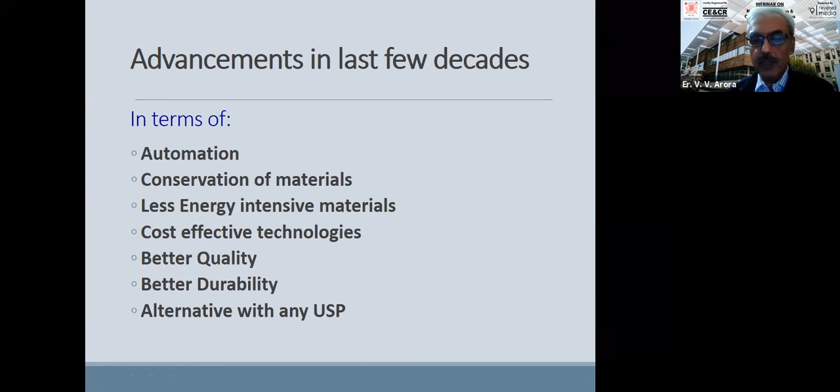The advancements have been in terms of automation, conservation of materials, less energy intensive materials, cost-effective technologies, better quality, better durability, and alternatives with any other USPs. The basic requirement when we do developments in civil engineering is that it should be a sustainable development and a safe development. Our focus has to remain on that, that things are sustainable and safe for the future.

For sustainability, we need emission reduction and conservation of natural resources. So we have to use low energy intensive materials, waste-based materials, lesser materials, and increase durability, because if structures last longer, you are also saving on materials, which is possible through proper design for durability. We call it performance-based design. You can optimize the design according to the performance, so you achieve better durability and better sustainability.

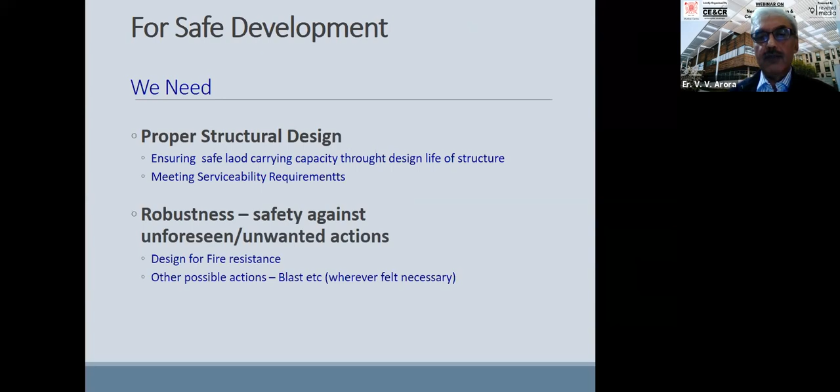For safe development, we need proper structural design, ensuring safe load carrying capacity throughout design service life and meeting serviceability requirements. And robustness, safety against unforeseen, unwanted actions, less fluctuations during the use, design for fire, design for blast, design for impact. Those are the things which are coming up.

Newer practices and materials, if you talk of, then increased use of materials we will see in near future is the supplementary cementitious materials, which are already in use in this decade, fly ash, silica fume, etc. Blended cements, slag cement, and now the tertiary blend cements are coming, composite cement, and LC3 cement, that is limestone calcined clay cement, is also coming now.

High strength concrete was there since long, but there were no specifications in our design. Our IS 456 did not have design parameters for high strength concrete. We could make high strength concrete, but designing structures with high strength concrete was a bit difficult. So that will be becoming possible now. High performance concrete had come in NBC, but it is still to be better defined for a better usage.

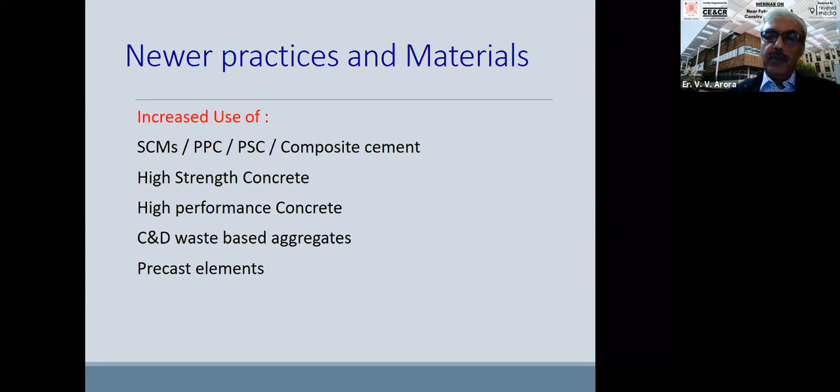C&D waste-based aggregate usage has started, but it has still to go a long way. Precasting is increasing, precast elements, and that is also to go a long way in the near future. Other newer practices which have come now are pervious concrete, geopolymer concrete, controlled low strength material for backfill, etc. Because everywhere soil backfilling doesn't sustain, many times you have problems of settling the backfills because we could not compact it properly. The new thing coming is 3D printing. There also significant developments have taken place.

Newer design practices are the performance-based design, design for durability, design for fire resistance, etc. There's a lot of work on design for durability world over, even in our country also, but less on the design for fire resistance. We will discuss on that.

Then comes the role of standards. You see, we have seen many times technologies available, but they don't get into much use in the absence of specifications and codal support. Recently, a lot of work has been done in this direction. This is necessary for promotion of newer technologies. Some BIS standards have been published, revised recently, and somewhere we are the leaders in the world also. Some standards are under revision and preparation.

These are some of the revised standards, new standards in the last few years. National Building Code came in 2016. There were big revisions in the fire chapters, then the sustainability and high performance concrete chapters had come in that. IRC 44 on concrete mix design has been revised, and pervious concrete has also come in that. Guidelines for use of C&D waste have come up in IRC 2017. So that will also promote usage of C&D waste.

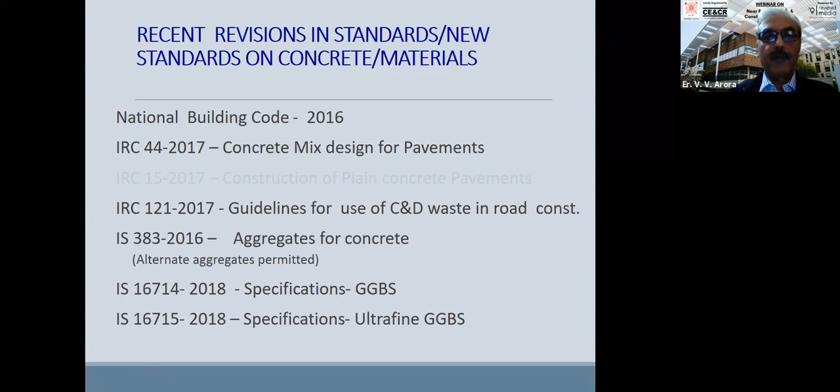Another development is the lightweight sintered fly ash aggregate for structural use. Sintered aggregate, fly ash based aggregates. Now, this has come for structural use. Earlier, the lightweight aggregates were not for structural usage. This document is for structural use of lightweight aggregates. One plant of IMFA has already come up in Odisha. And NTPC is also coming up with their project on sintered fly ash aggregates. So this will also come up because these lightweight structures have got a big role to play in reducing the materials.

Then composite cement, IS 16415. This is a tertiary blend where we use fly ash as well as slag combined, and we reduce the OPC content to a significant value, which reduces the OPC, which is an energy intensive material. But there are certain issues in that we will discuss. IS 10262:2019 on concrete mix design has been revised. Mass concrete has been addressed in that. High strength concrete is addressed in that.

IRC SP 63 revised 2-3 years ago, interlocking block pavements. Now, this I have specifically mentioned because in this code there is an introduction of pervious concrete and CLSM.

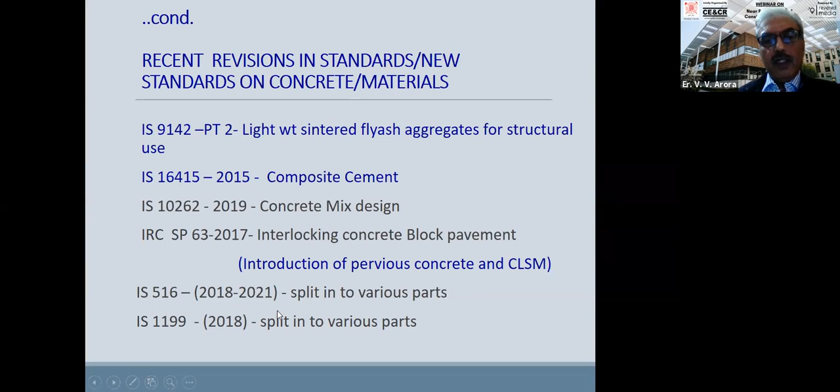IS 516, that is the test methods of concrete. This is a supporting code because without test methods, we cannot do much of the work. We cannot have developments. IS 516 has been split into various parts. This pertains to hardened concrete testing, and IS 1199 pertains to the fresh concrete testing. So this has also been split into various parts. Other numbers which were in for the testing of concrete, they all have been merged with 516 and 1199, and it is in a systematic document.

This is 516. Some parts came in 2018, some came in 2021. And now we have durability testing also covered in this, core testing. Then we have got included guidance on the evaluation of core tests, part 4 of IS 516. And this has been revised. Non-destructive testing has also taken place. UPV, rebound hammer, carbonation depth test has been added now. And determination of drying shrinkage, moisture movement, that has also come in this.

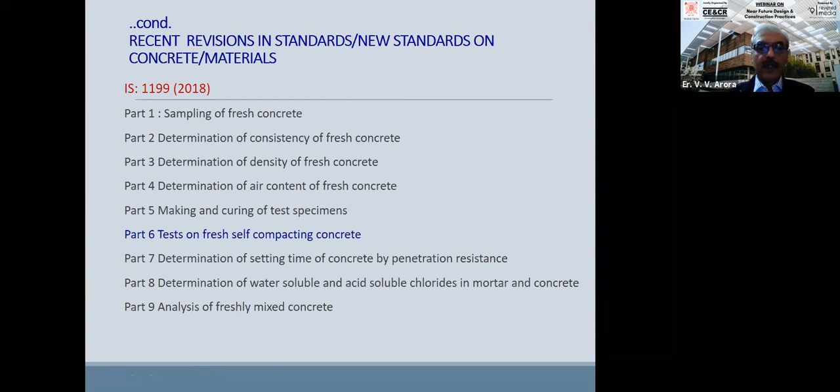And in 1199, one we see is sampling of fresh concrete, determination of consistency. They were already there. But test of fresh self-compacting concrete, that has also come now in 1199, which was staggered here and there earlier. So with these specification improvements, it will promote the developments in the newer fields.

Standards under revision are admixtures for concrete. Suggestions are invited from the industry on this. I had mentioned this earlier in one of the lectures also. More admixtures will be added to 9103, like corrosion inhibiting admixtures, crystalline admixtures, shrinkage compensating admixtures, and things like that.

IS 456, plain and reinforced concrete. This is the major code of civil engineering. This is also under revision. Major revisions will be taking place in this code, where we are talking of performance-based durability design, etc. And roller compacted concrete is available in IRC 68, and this is also under revision. And this will also be improved.

Recently published standard is geopolymer concrete 2021, whose usage has already started to some extent. And more players are coming in this. From abroad also, people are coming with patented mixes from Australia, from Finland, in the geopolymer concrete field. So we may see a good development in this area in the near future. Of course, it depends on the cost economics. If they can make it a little cost effective, you will have more usage. Otherwise also, this being a greener material to some extent, maybe this will also be a better development.

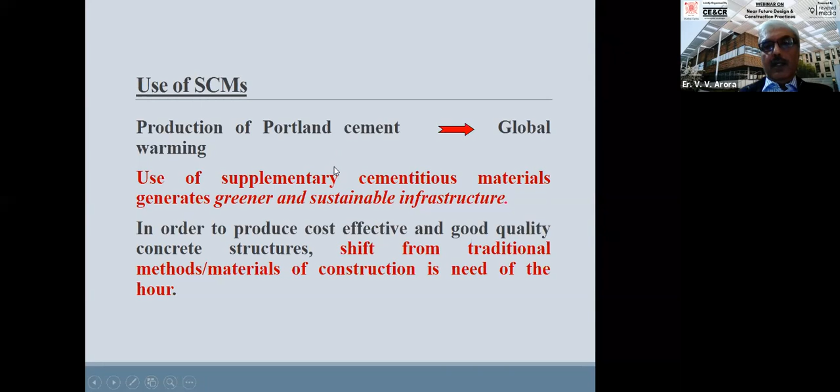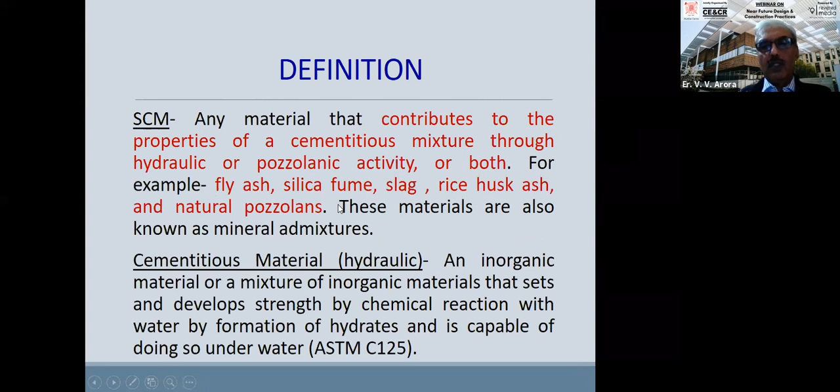Supplementary cementitious materials. This is not a new thing. A lot of work has already been done on this. This is just refreshing on that. It generates greener and sustainable infrastructure. Shift from traditional methods of construction is the need of the hour. Any material that contributes to the properties of cementitious mixtures through hydraulic or pozzolanic activity or both is called a supplementary cementitious material. In short, we call it SCM. So fly ash, silica fume, slag, rice husk ash, natural pozzolans, ultra-fine materials, they all come under this category.

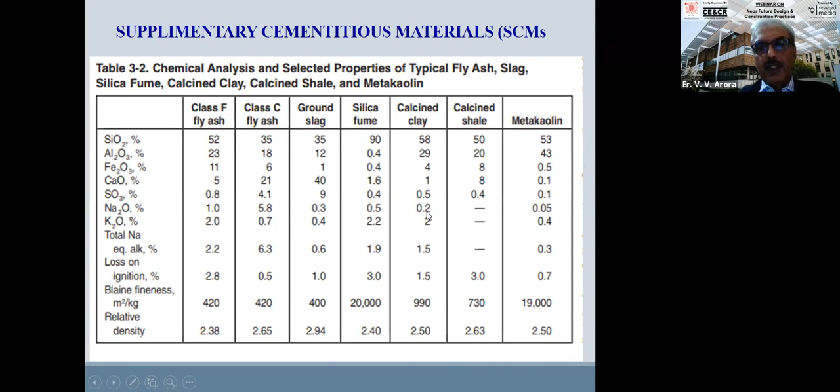Various SCMs are available: fly ash, ground slag, silica fume, calcined clay, calcined shale, metakaolin. Now, fly ash is commonly in use, but other things are still not widely being used. Now, ultra-fine slag has also come in this category. Use of calcined clay will be increasing in making of cements. Metakaolin will be increasing, and ultra-fine slag will be increasing in the near future, because they also have supplementary cementitious properties. For fly ash, we already have a document on this, 3812, and we can generally use it.

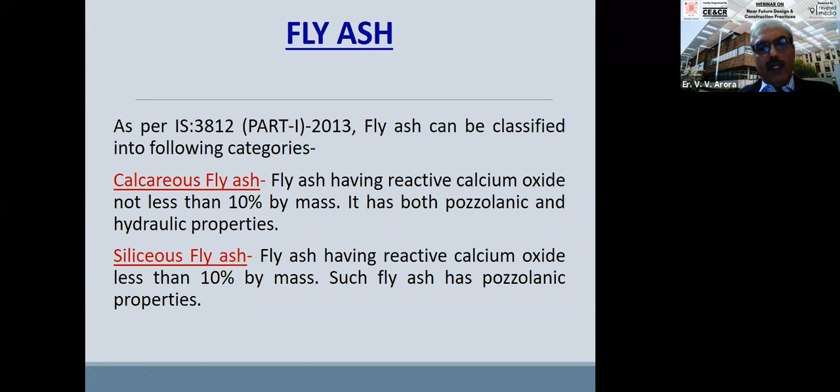We got two types of fly ash, siliceous and calcareous. Our fly ash is mostly siliceous.

The silica fume standard had come earlier, in 2003, long back.

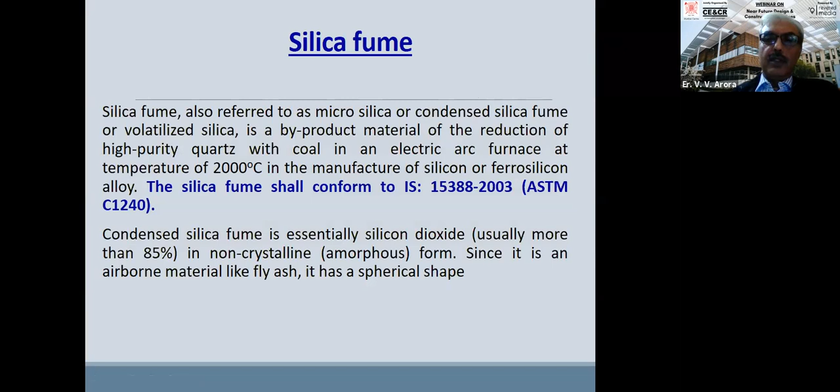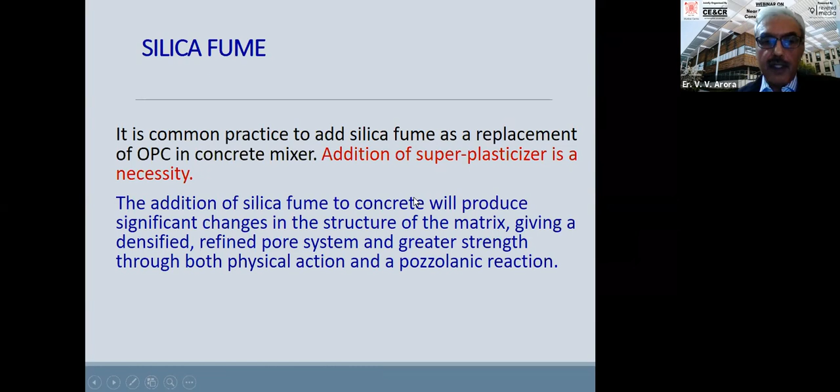Silica fume addition, along with a superplasticizer, is generally a necessity when we use silica fume. The addition of silica fume produces significant changes in the structure of the matrix, giving a densified, refined pore structure and greater strength through both physical action as well as pozzolanic action. Guidance on this is being added in mix design codes, IRC 44 and IS 10262. Generally it is used in the range of 2 to 4%, and 4 to 7% for normal concrete, 8 to 10% for high strength concrete, and for high chemical resistance, 10 to 12% also.

GGBS, ground granulated blast furnace slag, is a cementitious material, and the quantity used in concrete or in cement making is large. Only energy consumption involved is the grinding of the slag.

The document for general use of ground granulated blast furnace slag came in 2018, IS 16714. It is a non-metallic product consisting essentially of glass containing silicates and alumino-silicates of lime and other bases, developed simultaneously with iron in the blast furnace.

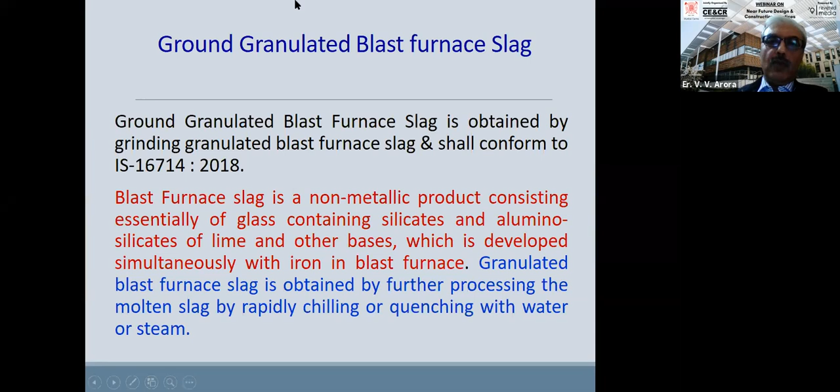This is a very good material for concrete and cement, and it can directly replace cement up to 50%, even up to 70%. Our Portland slag cement has this provision of 50 to 70%. So either people use Portland slag cement, or it can be used in concrete directly, wherever required at site, where proper mixing is possible.

If we are using it now, this is very good for resistance to alkali silica reaction. Wherever the aggregates are prone to alkali silica reaction, GGBS is used, and in that case a minimum of 50% has to be used to be effective against the alkali silica reaction. The requirements are covered in IS 12089.

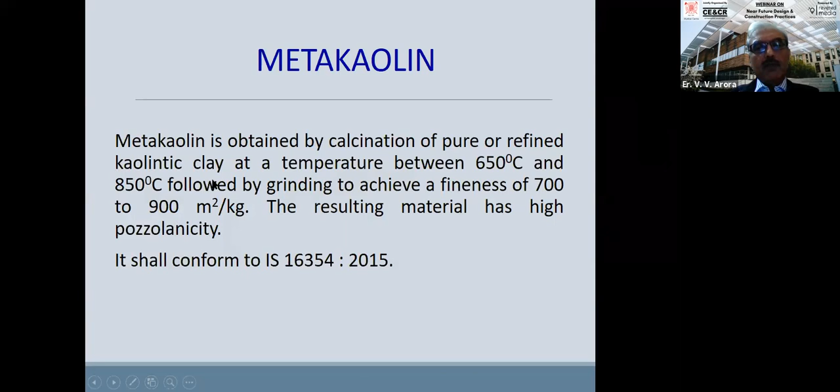The fineness of metakaolin is 700 to 900 meter square per kg. It's a very fine, ultra-fine material with very high pozzolanicity. But because we are not making much metakaolin in India, there is a clay limitation as well -- calcined clay is required for this. However, we do have some calcined clay reserves also, so we will see some usage of this in the near future.

Now this is a newer thing, ultrafine ground granulated slag. One is the granulated slag we just discussed, where we use 50-70%. But the same ground slag is then given ultrafine grinding. This becomes a kind of replacement for silica fume, which gives more pore filling effect as well as pozzolanic effect, with cementitious properties also.

Code provisions for ultrafine granulated blast furnace slag are given in IS 16715, 2018.

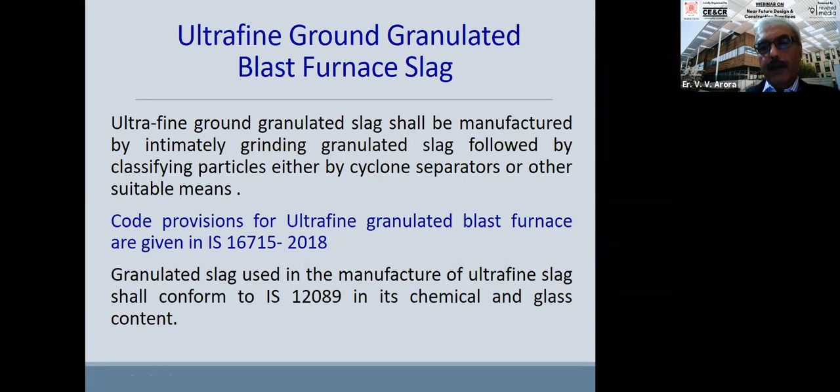Physical requirements for ultrafine slags are: D50, the diameter for 50%, should be less than 5 microns, and 95% of the material should have a diameter less than 15 microns. So this is a very fine material. Slag activity index is also mentioned in this. This material was already being manufactured, but specification was missing -- so now specification is also there.

Usage of this is increasing day by day. People have already started using it, and as high strength concrete design parameters come in IS 456, more high strength concrete will be used. When we use more high strength concrete, more usage of ultrafine slag will be there, and more usage of silica fume will be there.

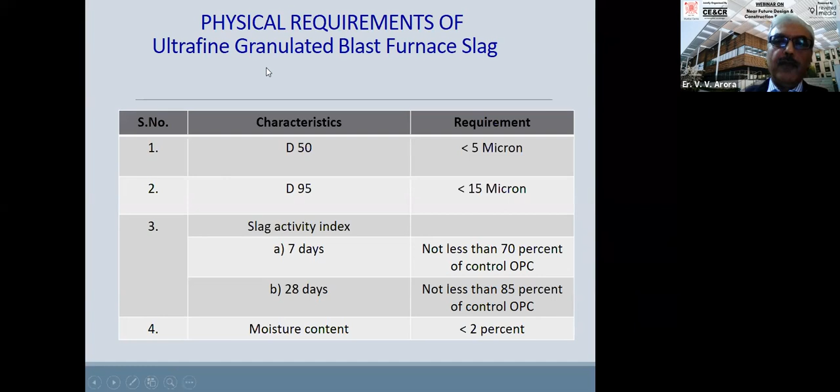Composite cement is a ternary blend cement where we use Portland cement clinker, fly ash, and granulated slag.

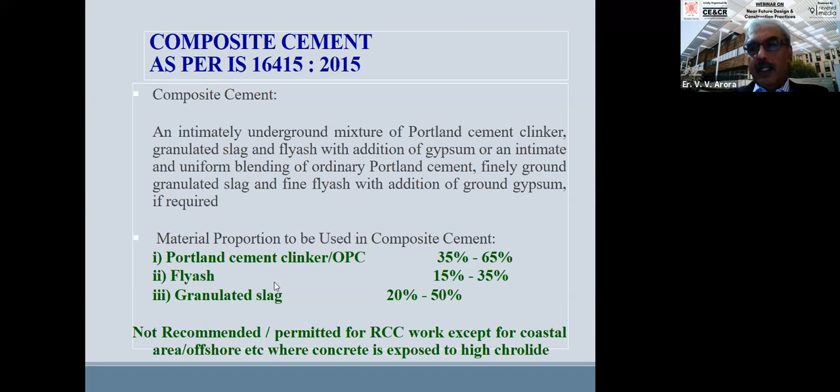In composite cement category, we have another cement, LC3 cement, also called LCC cement - limestone calcined clay cement. That cement has been developed, but the standard is yet to come, so it is not commercially available as of now, though a proposal on standard making is already in process. It is also a composite where we have limestone and calcined clay - calcined clay is like our metakaolin, so it's a similar technology with calcined clay and limestone Portland clinker. That will also come in the near future.

High performance concrete is generally a high strength concrete, but with specific requirements of higher performance for a particular need. This definition was very vague earlier - people had been using high performance concrete since long, but what is it exactly? There was no such document. Now in the last National Building Code, this was defined in a way, and categorization was also done, so slowly the usage of this will increase.

In fact, usage is already there, but the thing is to specifically specify high performance concrete. The performance requirements have to be decided for a particular usage, for which we need more research. As we get more research, we will have a better specification for high performance concrete.

High performance concrete can be for higher workability or constructability requirements, or we can have high performance concrete where we have strength and strength-related properties. If we say we need a high strength concrete, or very high strength concrete, that is also higher performance. We can say we need a very durable concrete - that is also the higher performance we are looking for. But then we have to specify those performances in numbers, so for that we should have certain data.

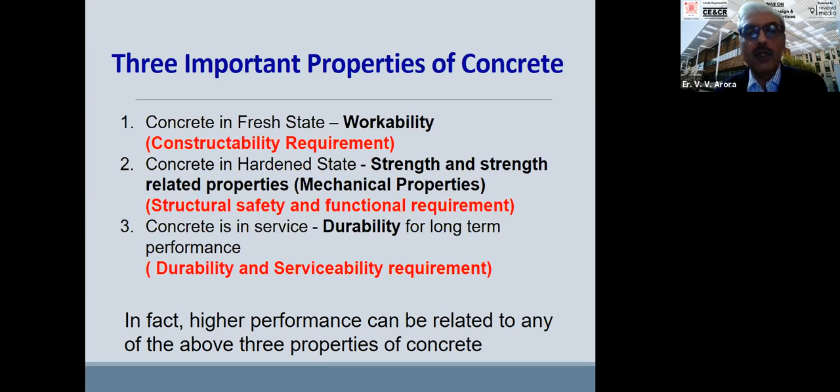Now for durability design, we are creating data for durability design in IS 456. And for other requirements also, for example if we need high resistance to abrasion, we should know for what application and what performance requirement should be there so that people can specify. Researchers are working on those things, and that will also come in the near future.

High performance concrete generally consists of basic admixtures, nothing much special - aggregates, water reducers, plasticizers, mineral admixtures, chemical admixtures, fibers, polymers, corrosion inhibitors. Depending upon the type of improvement in performance required, admixtures are chosen and concrete is made.

Some companies and RMC plants are already offering many kinds of things, but specifiers find it difficult to specify the requirements in terms of testing which can be done. So if I say high impact resistance, I should be able to specify the numbers - what high impact I am looking for, and for my usage, I should know those numbers. More work is needed on that.

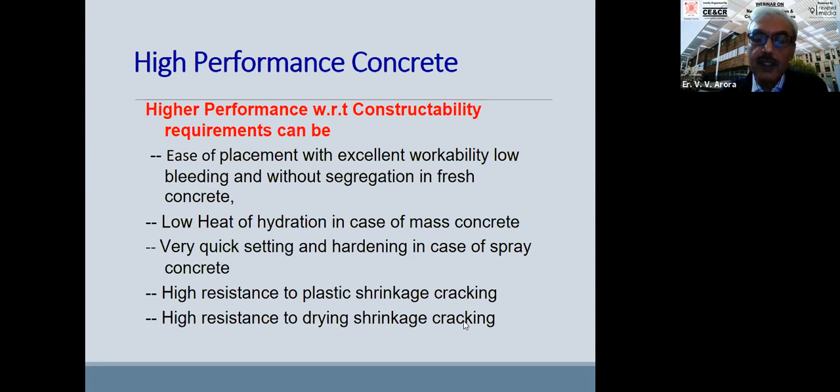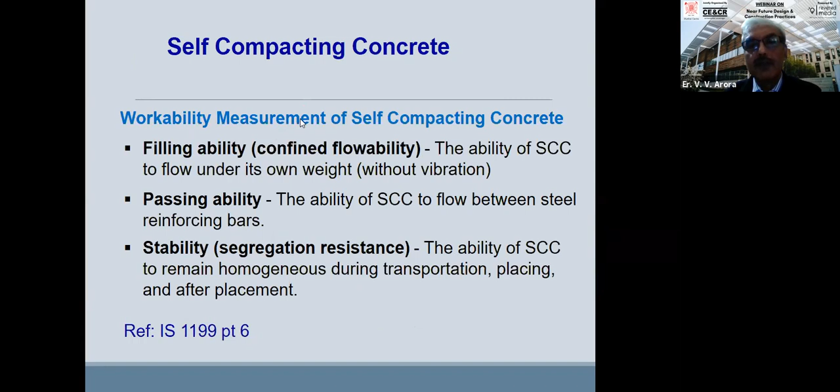High performance with respect to constructability is ease of placement, like we have self-compacting concrete. We can have high resistance to plastic shrinkage cracking, high resistance to drying shrinkage. For self-compacting concrete, we already have IS 1199 part 6, where test methods are given, so this can be specified in those terms.

When we talk of high performance with respect to structural safety and functional requirements, we can have high early strength, or high early flexural strength. We can have higher ductility, high resistance to abrasion as already mentioned, and low shrinkage and creep requirements.

Shrinkage reducing admixtures were being used in many developed countries, but in our country it is still not in use - not commonly available in abundance. Some companies are making shrinkage reducing admixtures now, but they have to get it tested, and some standard has to be there for that. In the next IS 9103 revision, these admixtures will be available with some specification, so that if an admixture conforms to those requirements, we can call them shrinkage reducing admixtures.

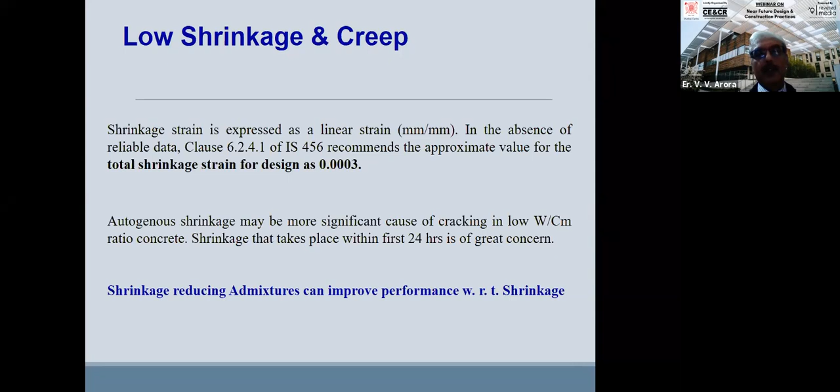So more research is being continued in this direction, but we will definitely see them in the near future.

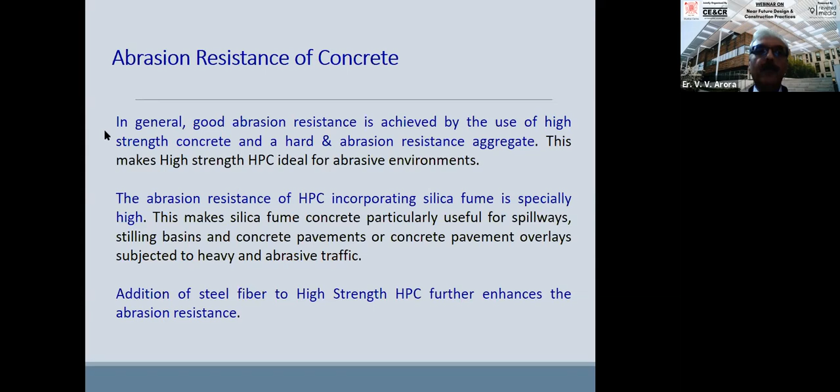Similarly, impact strength and penetration resistance. Incorporation of steel fibers increases the impact strength also, and silica fume also increases these properties. We do have test methods for this. Drop weight impact testing is there. For abrasion also we have got tests. But then we have to decide the specification.

Concrete can be classified into various categories depending on strength. We have low strength concrete, conventionally, not as per IS 456. Categorization: low strength concrete is up to M20. Beyond M20, 25 to 50 is moderate strength. High strength 55 to 120, we now call it 65 to 120. And beyond 120 comes ultra high strength concrete, which has already come.

The researchers are working on that. Some companies are also working on that, which can be macro defect free concrete, densified small particle concrete. Reactive powder concrete is a common name for this also, and aggregates are missing. That is why we call it reactive powder, because we don't use aggregates when we go beyond a certain value. Aggregate-concrete-mortar interface becomes a weaker zone, so aggregates are avoided.

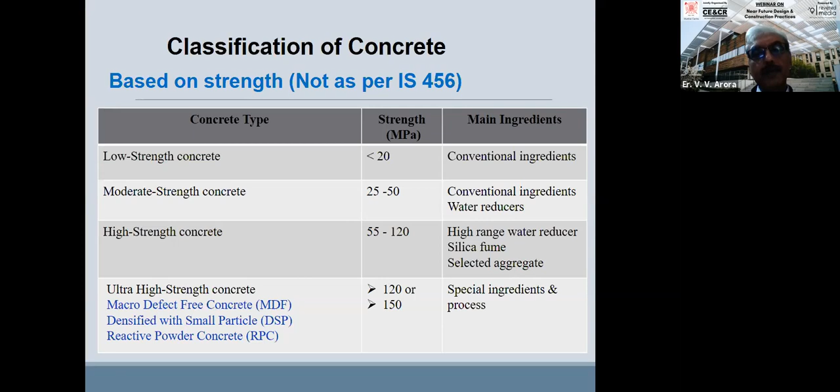As per IS 456, categorization is ordinary concrete, standard concrete, and high strength concrete. Ultra high strength concrete is not yet put in IS 456. It will take its own time once the technology is developed fully, properties are well known, and Indian material is tested for properties. Then it will be included in the codes.

Now in the coming code, IS 456, design parameters for concrete up to M100 are being added. Earlier we did not have design parameters for high strength concrete. We had this high strength concrete in our current IS 456, but then the note is given that for design parameters, refer to expert literature, specialized literature. The new code will have detailed provisions for high strength concrete design.

So a structural designer would find it very convenient to use and specify high strength concrete, and those approving the designs will also have some specification in hand to approve those structures. So then the usage will come up, but ultra high strength concrete is still at a primitive stage. It will take some more time.

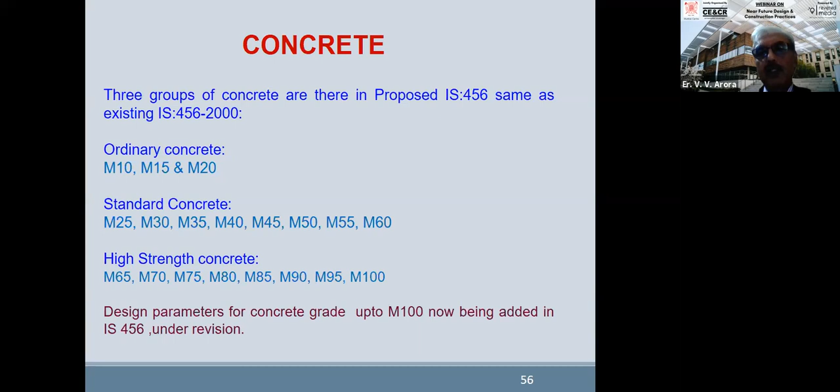Same thing, it is there. Some findings summing up on these specific materials on high performance is addition of silica fumes. This is a summary of what I have said earlier. It improves flexural strength, split tensile strength, abrasion resistance, and impact resistance. And inclusion of steel fibers enhances toughness, moment capacity, tensile strength, ductility, impact resistance, and abrasion resistance of concrete.

Concrete with abrasion resistance property can be designed using silica fume, high-range water reducers, where aggregates are mechanically strong, addition of fly ash, and a higher grade of concrete. When used in combination with these materials, that really produces a high-performance concrete. Because if our grade is low, then even if you add these materials, you will not be able to achieve a high-performance concrete. That also has to be kept in mind.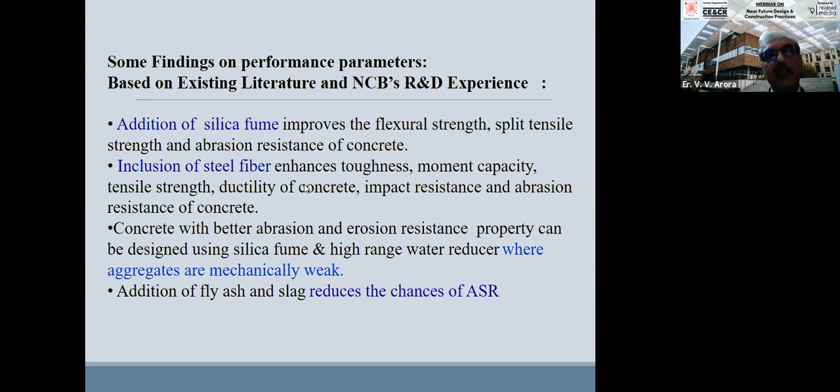Coming to high performance with respect to durability requirements, I will discuss this a bit later in this lecture, under performance-based durability design.

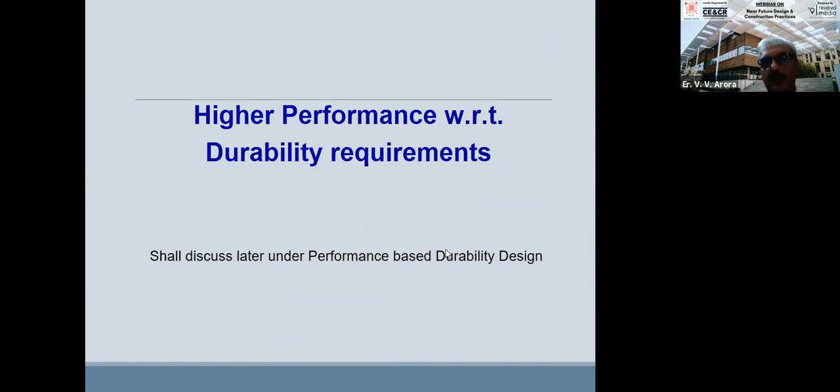Before that, let us come to recycled aggregates. Recycled aggregates are construction and demolition aggregates which are produced from construction and demolition waste. That is, we are recycling the old concrete.

In the forthcoming decade, the availability of naturally occurring construction materials is going to be exhausted. So the need of the present system is alternative construction materials like recycled aggregates, either coarse or fine aggregates; both can be generated from old concrete. If the old concrete is good quality, high strength concrete, you will get good quality recycled aggregates. If you are crushing a very poor quality concrete, you will find poor quality recycled aggregates.

Those variations are a big hurdle in the usage of C&D waste. If somewhere the structure is being rebuilt, if you are breaking a bridge and making a new bridge, or a multi-story is being demolished and a new structure has to come up, there it becomes easier because the grade of the earlier concrete is good and known also. Then in-house crushing will be better instead of sending the scrap to the C&D plants, because there it gets mixed up.

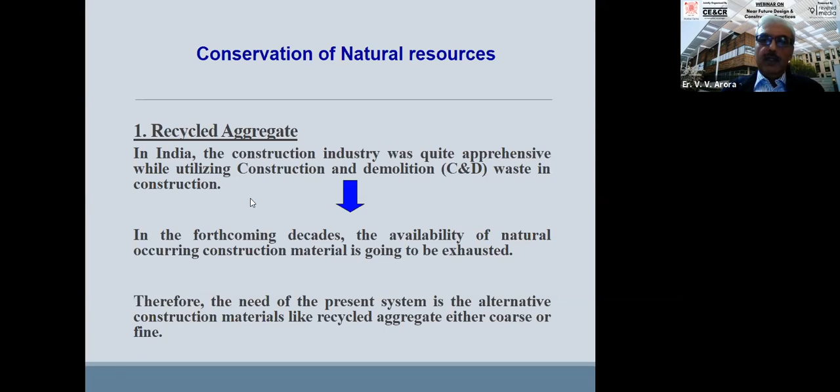I see alternatives to natural aggregates. C&D waste-based aggregates, we are now mentioning in 383. Then we have other alternate aggregates: slag-based aggregates, copper slag, air-cooled blast furnace slag, steel slag. Steel slag is to be avoided in RCC because it contains free lime. Now people are putting up weathering plants to remove the free lime, but caution has to be taken with this steel slag. But air-cooled blast furnace slag and copper slag are very good materials. These two materials can be used.

C&D waste, we are coming up with specifications, so this will be used. Fly ash sintered aggregates, I already discussed. A new standard has come, 914 in 2020, very recently, and IMFA is already making those aggregates in Odisha. NTPC is coming up with a new plant. So all these alternatives to natural aggregates will be available in the near future. Steel slag weathered aggregates will be there, but I will recommend them for usage in non-structural things only, not in buildings, because if weathering is not proper, we may have some risk.

C&D waste, if you see, this we discussed already. The C&D waste comes in two categories. One is recycled concrete aggregate, and there is recycled aggregate. The first is a better quality aggregate, when we demolish waste concrete. The other is when we demolish a building and concrete, masonry and other things get mixed up. This can be used for some non-structural purposes. For structural purposes, we have to use RCA.

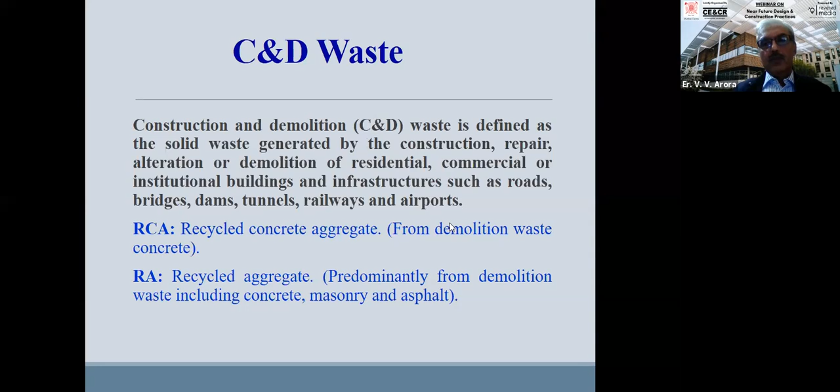The only thing is, government has to come up with a collection of waste. In all countries, a lot of waste is being generated, and collection systems are still not very good in place. Everywhere we have to create dumps in different areas where people can throw C&D waste. Now people pick up the waste and put it in any vacant space they find, and sometimes on the roadside also, which is a bad scenario. Once that scenario is improved, usage will also improve, because as far as crushing is concerned, there's no issue. Many plants will come up. Once waste is available, many people will crush and sell it.

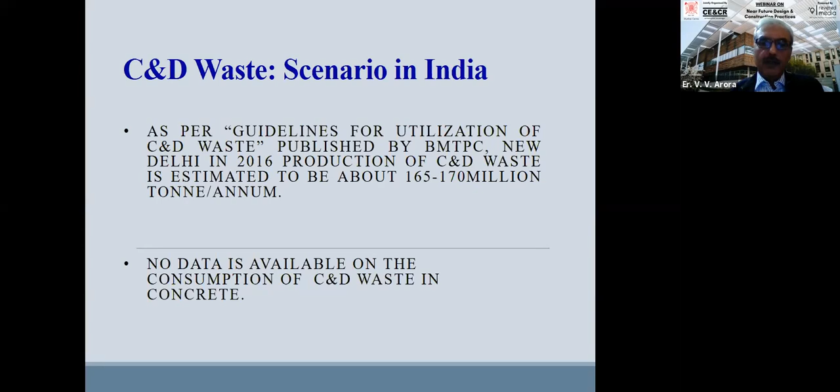This is the scenario world over of C&D waste. Australia says they have got 57% usage, and Belgium also. But in many countries, even though percentage usage is shown high, their structural usage is less. More of the usage is in plain concrete, and RCC usage even in other countries is a challenge, because generating that kind of confidence is bigger. In Japan, even though they say 80%, they have very good aggregates and their old concrete is good quality. But still, people have hesitation in using it in RCC, and the usage is mainly non-structural, with some structural usage in lower grades.

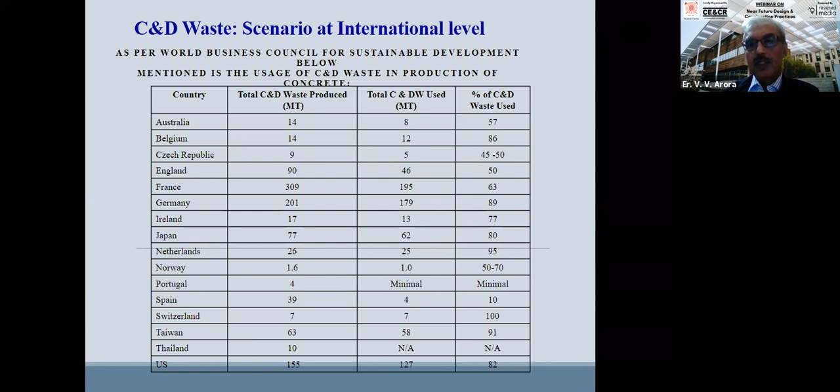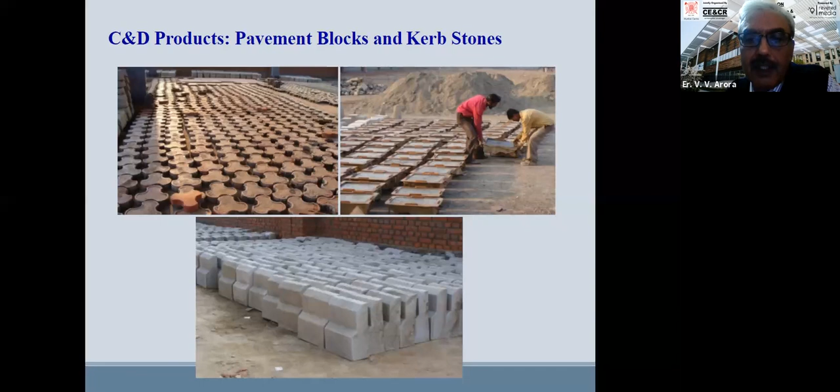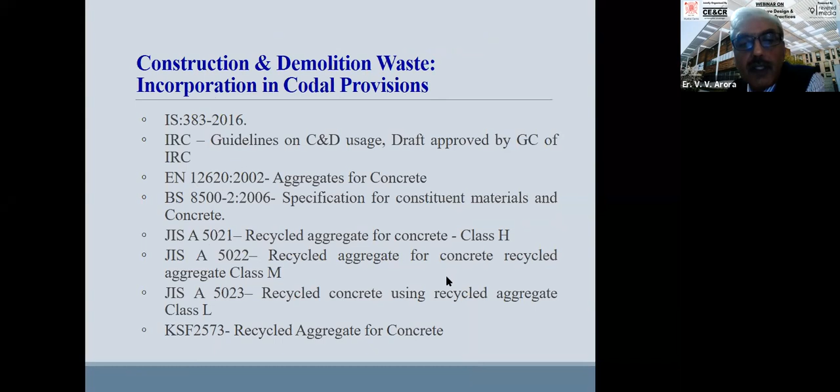If you have got class 1 aggregates, you should be able to use them in the main structural buildings. That work is still to be done, and as that is done, we will see more usage of C&D based aggregates. Current specification, we have 383, IRC has put up a guideline. EN code is there, BS code is there, JIS code is there. In the Japanese code, we have got a classification of different types of recycled aggregates. The Korean code has also got a recycled aggregate specification.

In 383, in 2016, alternate aggregates were permitted. Iron slag, steel slag, copper slag, and bottom ash were permitted. Similarly, the C&D waste also. In 383 2016, recycled aggregates are permitted up to 25% for plain concrete, and for RCC up to M25, 20%.

And for PCC, 25%. In IRC 15 2017, 30% has now been permitted in the DLC layer only, but in the upper layer, the pavement quality concrete, it is not yet permitted because the abrasion issue is there. But if we use a two-lift construction, that document is coming, there we will be able to use the C&D waste aggregates in the lower part of the PQC.

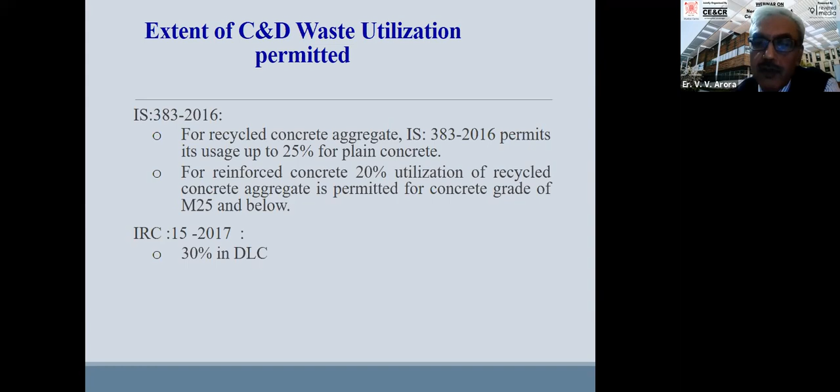Coming to the conservation of water, we have got pervious concrete. Pervious concrete is not very common in our country because there is an issue. This can be used in pavements where the water simply flows down, or it can be used under the roads as a drainage layer, because all roads have got drainage layers where the water percolates to the ground or to the nearby drains. We can have a percolation layer that can be connected to a nearby drain and water can be allowed to flow. This is a concrete in which the water flows freely.

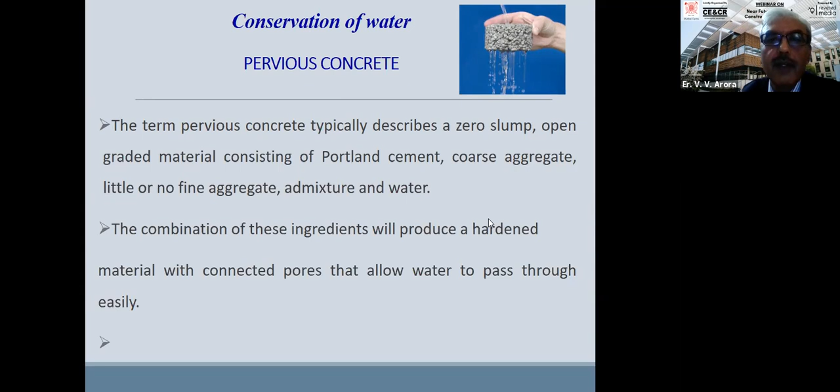The void content ranges from 15 to 35% and strength is 5 to 25 MPa. ACI has got a good specification on pervious concrete, and ISO is making a specification on pervious concrete. A test method on pervious concrete has also already been made by ISO. The drainage rate is generally in the range of 0.135 to 1.22 centimeters per second. Higher the fine content, lesser will be the void content and lesser will be the permeability.

And they are prone to choking by water containing solid particles. That research is also needed, how to unclog it and where it can be used, where it cannot be used. Currently, IRC has permitted usage under the pavements so that it can act as a drainage layer. This is a very good material for that.

Geopolymer concrete. This is a new and very promising material. This is a concrete where we don't have cement. No cement concrete, many people call it. It only consists of fly ash, GGBS, and strong alkalis, and they react at the site in the mixer to form a concrete directly. A new standard has been published in this during last month. Oh, sorry, not last month. This is an old slide, maybe from a few months ago.

Now this standard is one of its kind in our country only. Other countries do not have this kind of standard available. People have some specifications, but ours is quite a wide-ranging specification. We are enabling a code kind of guideline for mix design.

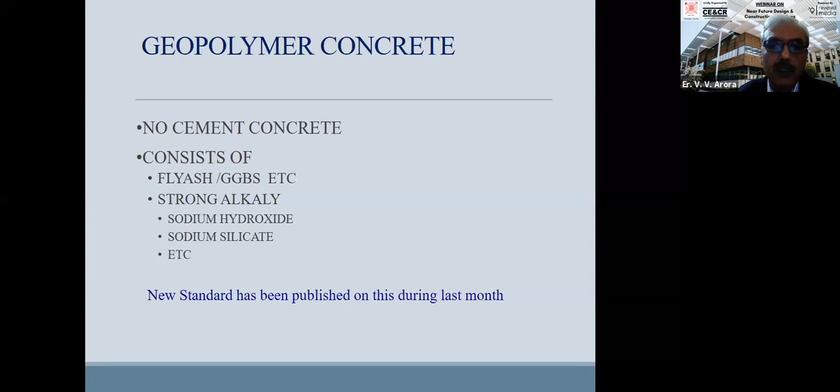This is geopolymer concrete paver blocks. This we had made in our laboratory at NCB when I was in NCB. This is a photograph of a pavement we made there as a test stretch, and this has performed well. These are M35 grade blocks we had created. There were minor issues because of the equipment, but once we use better equipment, those issues will not be there. And this is a very good material.

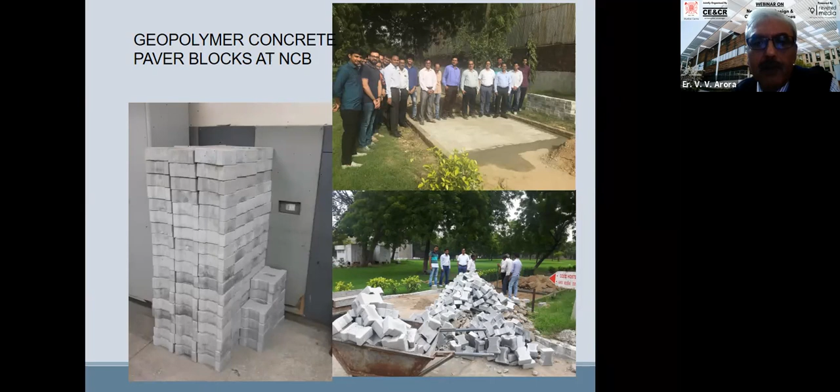This is a greener material, and there is absolutely no issue in using it in non-structural components like paver blocks, kerb stones, and things like that. In buildings, in Australia and elsewhere, people are using it in RCC construction. But here we are still not allowing it, so that people can develop the competence. Let the players be there to do this, and then those things can be done.

This is the document: alkali activated concrete for precast products guidelines. The grades shall be limited up to M40. Applications can be paver blocks, kerb stones, blocks, etc.

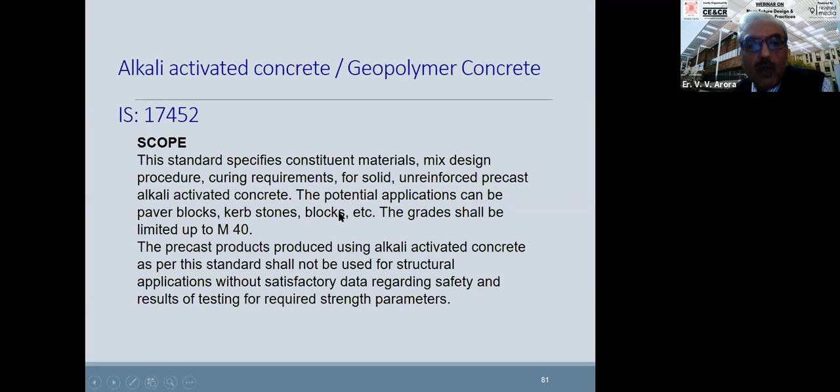Alkali activated materials have been defined in this. What alkali activated materials can be used, and what is the definition? Everything is there. The binding materials that are permitted are pulverized fuel ash conforming to IS 3812, GGBS conforming to IS 16714, metakaolin. All this we discussed previously. Calcined clay also, silica fume. All these are the binding materials which can be used. It is mentioned in this document.

So different institutions, different people are using different technologies, different combinations. So we have permitted all kinds of things. You do some performance testing. It is also a kind of performance-oriented code where you can use any of these materials, and then you can create a concrete. If it meets the specification, you can use it. So initially it is not for RCC.

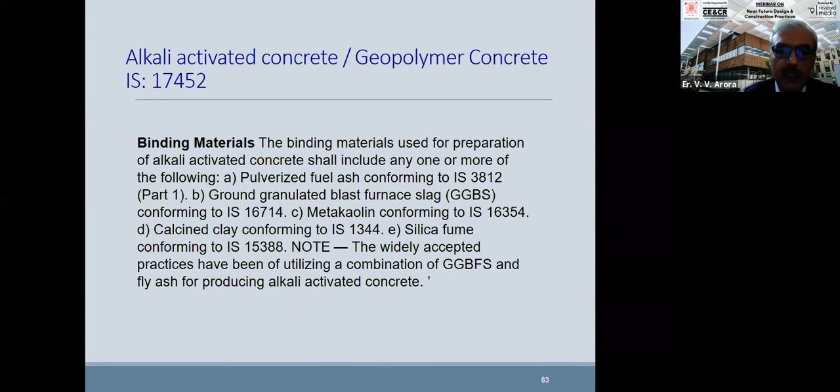Alkali activators are generally sodium hydroxide, potassium hydroxide, sodium silicate, potassium silicate, sodium carbonate, potassium carbonate. Most commonly used activators are sodium hydroxide, sodium silicate, combination of sodium silicate and sodium hydroxide, combination of potassium silicate and potassium hydroxide. But others have also been permitted. So those who have done their work on that and want to use that, they can do it.

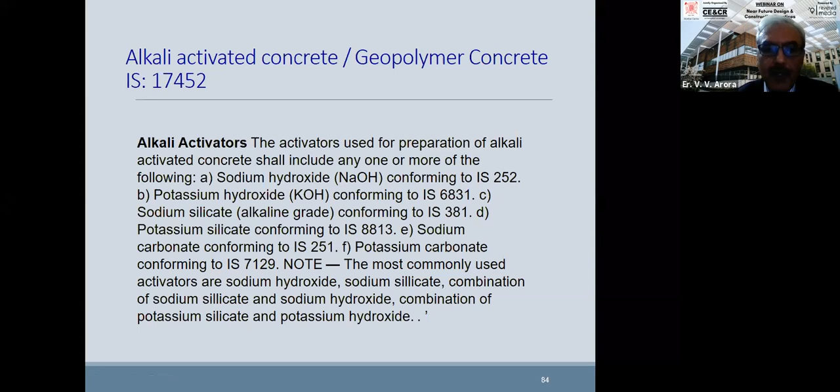But what we are lacking in our country is research on admixtures where we can improve the workability. Issues are there, quick setting issues are there when we do normal temperature curing. If you do high temperature curing, then the use becomes restricted to precast components. So this is possible at normal temperature also, about 25 degrees, 30 degrees and above. And you can use high temperature also. So different combinations are possible. People are using different technology.

And this document gives a good guideline on creating mixes also. Guidelines for mix design are also available in this. Guidelines for production have been added. And safety precautions have also been indicated. These are quite risky to use, so those precautions have also been put in this document. It's a good document. One should go through this.

Now, what we are still lacking is, we have made a document on the production of alkali activated concrete, but we have not permitted its use anywhere. Neither IS 456 permits, nor any precast paver block code, nor the wall block code 2185 permits it so far. So we are working on issuing amendments to those codes, 2185 and the paver block and kerb stone codes, so that this can be used there. Those amendments will come in the next few months maybe.

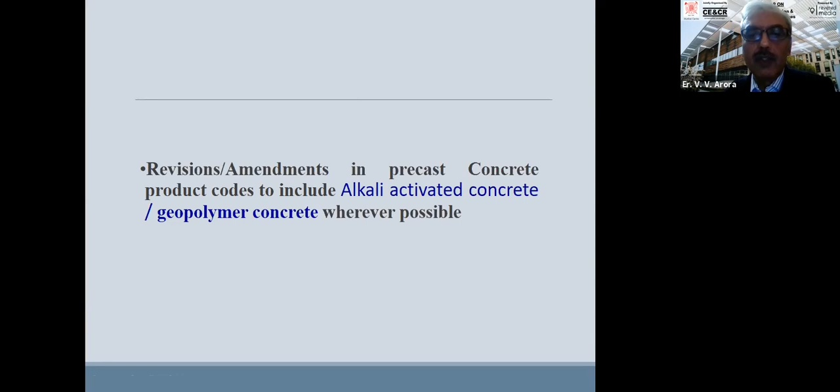Once that comes, you will be able to produce the blocks conforming to IS standards using geopolymer concrete. This will be a good thing, and there is a good future. Many companies are coming from abroad also, and Indian companies are also working on this. Mr. Sunny Surelekar, his company is also working on geopolymer, I think. He will throw more light on this when he speaks after me.

Then newer technology is the, how much time do I have? Still half an hour or so I have. Okay.

Then we have this 3D printing technology. It's a very exciting technology. It saves a lot on labor. Though we don't have much problem of labor, mechanization, as we have seen, improves the quality also, and many times it improves the speed also. It is not only labor saving, because labor will be used elsewhere in making this equipment and other things, and so much infrastructure will be created.

This is three-dimensional printing, it's fast work, and for many things it will be a very good alternative. 3D printed concrete means 3D printers come in when you make an AutoCAD drawing. The current AutoCAD has a provision for creating STL drawings. If you make a 3D model in AutoCAD 2019 and above, I think, you can save your 3D models in STL format, and those STL files can directly be used by the 3D printer to create that structure. Only thing is you have to mention the scale and all that. Those are the print commands.

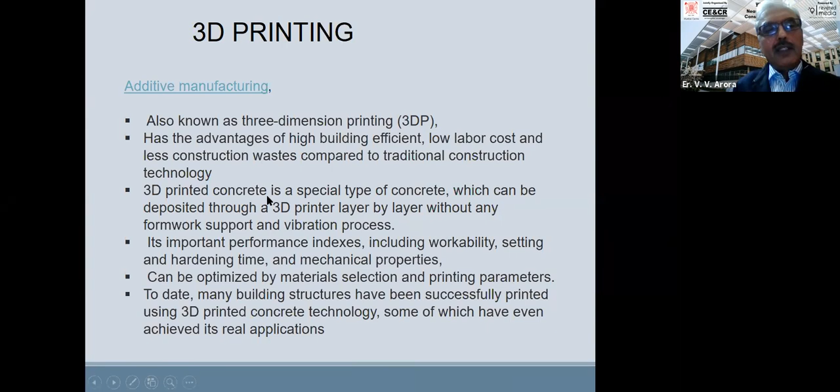Like when we print an AutoCAD drawing, we mention the size of the drawing sheet: this is to be printed on A1, this is to be printed on an A2 sheet. Similarly, when we do 3D printing, we create a 3D AutoCAD drawing, a solid model. That solid model is converted to STL format. For that STL file we give a print command with the scale. Whatever scale the house is to be constructed at, you just give that scale, and the construction will come to that scale.

You can just change the scale and create a small model of the house also. I mean, this is something where you create separate models. Now you can create actual models also for the scale.

See, this is how the layer by layer construction is done. We can have various kinds of structures, whatever we want. We can have multi-layer, anything. We can have intermediate mesh kind of structures. And architecturally we will have no boundaries when we do 3D printing.

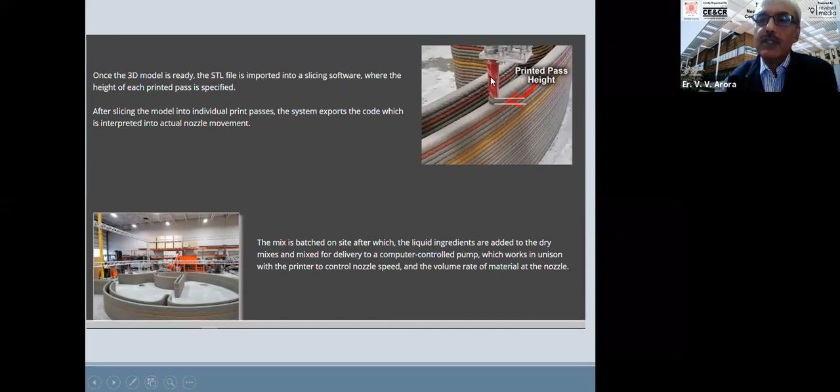Because this kind of construction done manually becomes very difficult. You have to make the formwork accordingly. That formwork expense is saved here. So there is no formwork involved in this. The only thing is you need a good printer. And then what you need is a concrete which starts setting fast. Fast setting concrete has to be there, which fulfills the requirement of 3D printing, which generally is created using admixtures of accelerators, viscosity modifiers, and things like that.

And for many small things nowadays, you can even create a drawing and send it to some suppliers. They send you models. But for actual construction, you need this kind of printer at site. These are a few other sketches of the 3D printing taking place. This is a constructed house.

Now, coming to the Indian scenario. Those previous pictures I've shown you were pictures from other countries. Now, this is an Indian picture where this sample is created by a startup of IIT alumni. IIT pass outs had done some work in IIT, and now they have started a startup. So they have made this house, and they have started commercial production in India. So this is a very exciting and encouraging thing in these technologies. We are coming far.

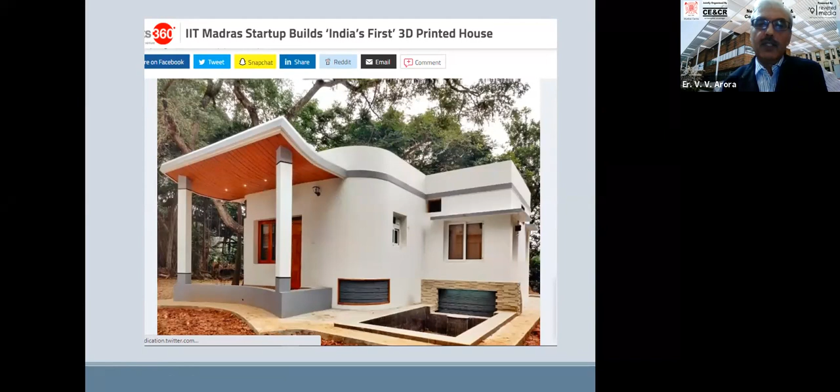And this is done by L&T. L&T is also coming to this. They have constructed a 2-story house using 3D printing. This is also a 3D printed house. So as this thing comes up, more guidelines and specifications on this will also come slowly. If it becomes popular, then the experience is there, competence is developed. Once the competence to construct develops, then competence to make specifications also comes from there on. Because for making specifications also, you have to have competence.

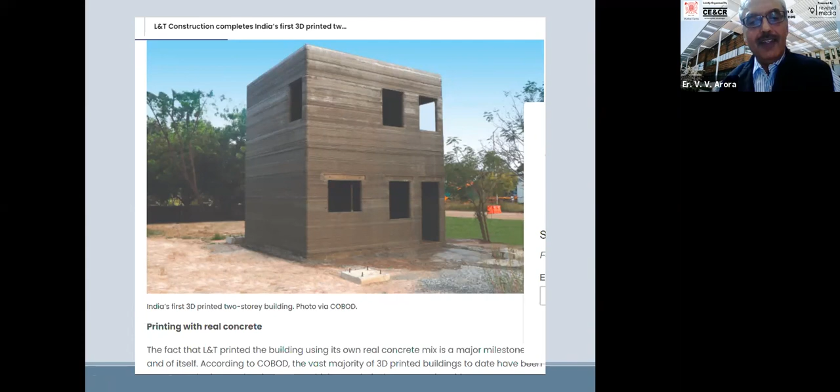Another is controlled low strength material. This is for backfilling, where we can dig and fill it. We don't have to compact it, as it is self-compacting, self-compactable, flowable, low strength cementitious material. In cement and concrete terminology, ACI has got not a specification, but a complete report on that. As per specification, the strength is around 8.3 MPa or lesser. It's a low strength material.

So it's got a wide range of applications like filling voids under existing pavements, buildings or other structures. Particularly when you dig a road for laying pipelines and you do the refilling, those fillings are never compacted. There you can use CLSM. And if you have to dig it later on, then you put the CLSM beforehand so that you can dig it later on and refill it.

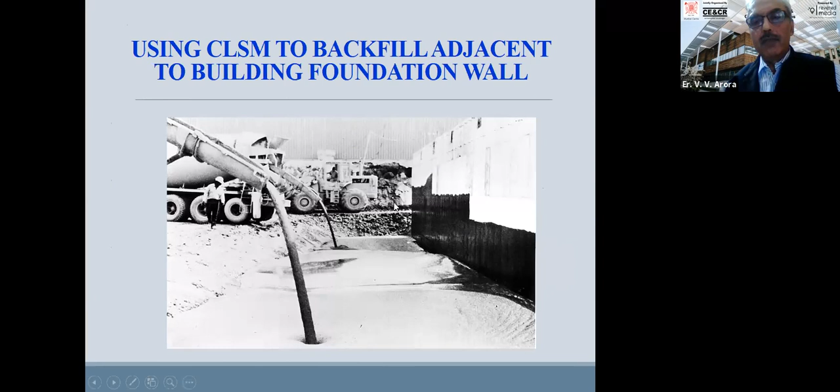This is a flowable concrete kind of thing, and this is being used in the backfilling of trenches adjacent to building foundations. So this is a building foundation wall. You cannot put a roller here and start compacting; it becomes a difficult scenario, because that will have a lot of horizontal impact. So these things are useful. This is also coming up.

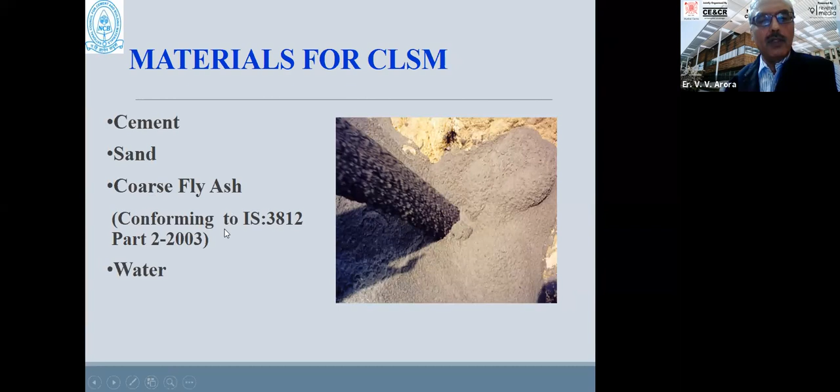We have got a specification. Now IRC has also given a small specification on this, as I mentioned earlier. It contains cement, sand, coarse fly ash. Coarse fly ash is good for this. 3812 Part 2 is good. Mix proportioning guidelines are available. Cement content varies from 30 to 70 kg, and fly ash content varies from 460 to 1200 kg.

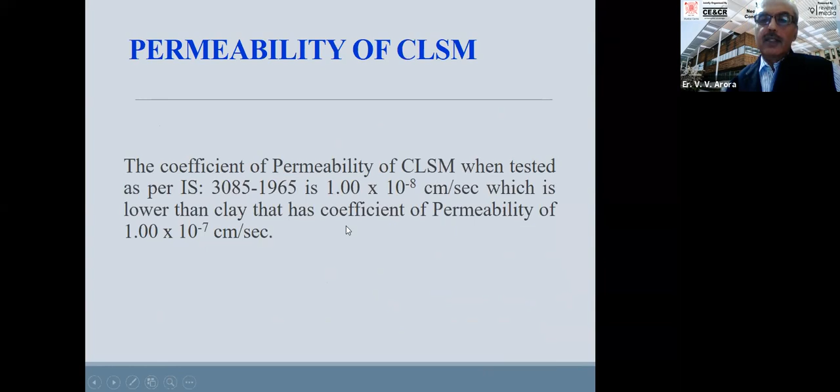Permeability of CLSM can be tested as per IS 3085, and this is 1 into 10 power minus 8, which is lower than clay. That is the coefficient of permeability of this. So it's a bit lower permeability than clay, but it is stronger.

Future aspects of this are that it will be very difficult to find soil for backfilling. That is one thing. But second, what I feel is even if you have soil, there are many places where you have compaction difficulties. So they're also very useful. IRC SP63, interlocking concrete block pavement, mentions some specification about this. This can be used under that.

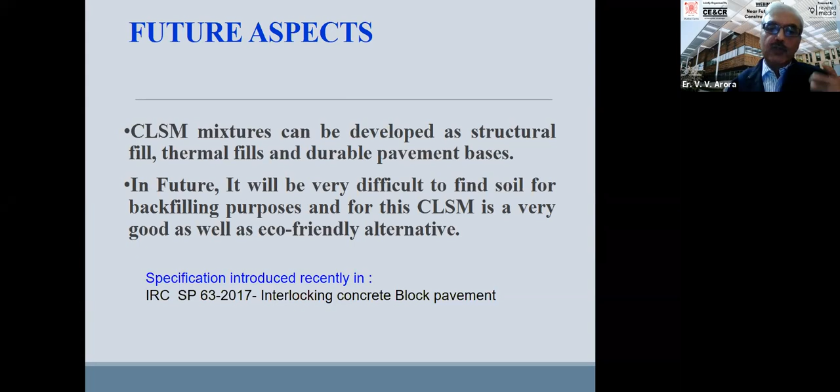This is mentioned in that because on the roadside we are putting the interlocking pavement where our future services go. So that part is left as the block pavement. So once we remove that, then you should have a CLSM filling there. That is why it has been specified there. Coming to the durability, which we were discussing earlier.

Now we had been discussing the developments in material technology and concrete technology. Now these are the developments in design technologies, how we design our structures. When we design our structure, we design for a certain strength and we have to design for a certain life. But today our codes are silent; if you made a structure as per IS 456, you cannot guarantee how much life it will have. People generally say 50 years, but the code doesn't say 50 years.

So if you have to design a structure for 75 years, you don't know what specification you have to improve upon. The CPWD maintenance manual says our structures should generally be for 75 years. But how to make it 75 years, nobody knows. So service life design is a performance-based design where we decide the performance. Performance is that we want this structure to survive for 75 years, or 50 years, 100 years. So that is a performance requirement. That means the structure should be able to perform till that age.

Now, how do we do that? Our potential deterioration mechanisms causing durability problems are the permeation of carbon dioxide into the concrete and the permeation of chlorides into the concrete. This is called carbonation-induced corrosion. This is called chloride-induced corrosion. There are other issues also, but this is the predominant issue I'm discussing. And out of these two, our predominant issue is the first, carbon dioxide, because chlorides are not present all over the country.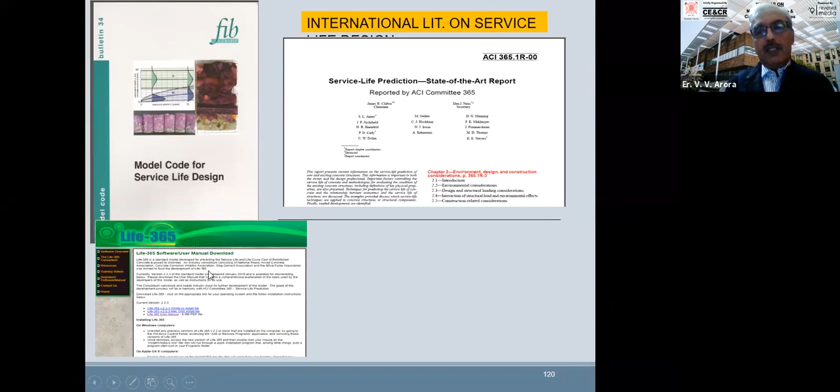ACI Life-365 has become famous because it is software. But this software, we have seen, doesn't give very good results, and it is not of much use to me. Then we have an ISO document, ISO 16204, which was revised in 2012. This is a good document, but it also speaks of the basic concept of service life design. It gives models for assessment of the service life.

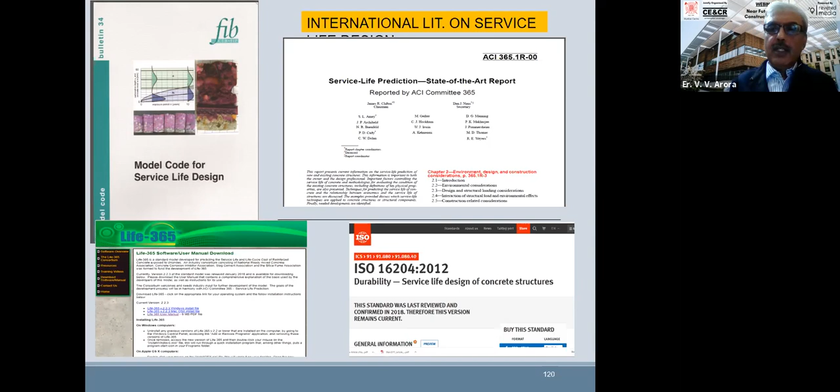But many coefficients required are missing in it, and they say they should be established at the national level. We have done a lot of research in this area, and other institutes, IITs also, are working on this, and we are able to work out those coefficients and the procedure for design for carbonation. Current developments, as I've said: the fib model code is there, similar to 16204. Japanese guidelines are available, ISO is there.

Now, this is the common model which is used. Why we have to use this model is how we assess the service life. How do we determine service life? We assess the service life because we say carbon dioxide ingress deteriorates the structure. How does it deteriorate? When the carbon dioxide enters the concrete and reaches the cover depth; C here is called the carbonation depth, cover concrete.

And when it reaches the cover concrete, it depassivates the concrete. When the carbon dioxide enters, it consumes the calcium hydroxide available, and the pH value of the concrete comes down. A lower pH then breaks the passive layer around the reinforcement, and reinforcement starts corroding from that time onwards. And once the corrosion comes, the cracking and spalling occurs.

So if the carbonation depth is less than the cover depth, the structure is safe. When the carbonation depth reaches the cover depth, then your service life is near completion. The corrosion will start occurring over there. You will have some few more years after that, but then it starts in a fast manner.

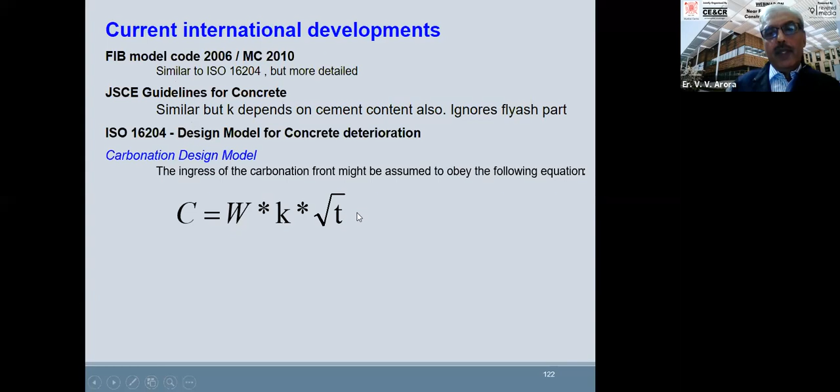We have done a lot of work on this model, but what we have seen, and some other researchers have also pointed out, is that it may not always be root T. The power can be little different. When we use different kinds of cements, OPC, PPC, this may not be root T power 0.5, which is the square root. We have to use a different power, 0.4 to 0.6. So it can vary from 0.4 to 0.6, but the basic model is similar.

So considering this model, this is being considered for the performance durability design for carbonation. And the details of these are being worked out. Weather coefficient is also being worked out based on the lot many investigations conducted in the country on deteriorated buildings. From there the weather coefficient is being worked out, and that will come in our new IS 456 standards. We will be giving methodology to work out this, and simplified tables also.

Last lecture, Mr. Oja had given detail on this, and there was some criticism that this is very complex, but it will not be complex because simplified tables will also remain, and calculation-based design will also be possible. So those who want to do important structures or want to go into detail will be able to. Those who want to use simplified tables, as they're using now, will be able to do that also.

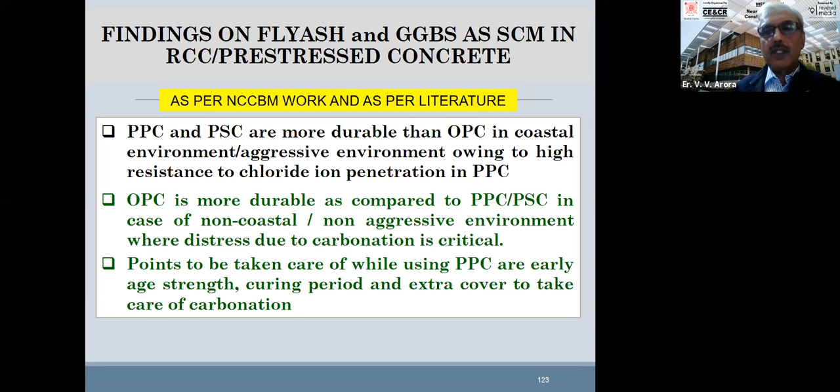And then you can test the carbonation coefficient also. We give carbonation resistance coefficients based on the water cement ratio and type of cement also, for simpler usage. And you will be able to test it also in the laboratory.

So major changes which are likely in the durability provisions: performance-based design is coming up. Concept of design for durability is being introduced, that this is a performance-based design. Concept of service life is being introduced. Provision for durability design for 50 to 100 years. Exposure classes are different for different deterioration mechanisms.

Today our exposure classes are not different. We say whether it is a carbonation mechanism or a chloride mechanism, we don't differentiate it. But Eurocode has got different exposure classes where the structure critical deterioration is carbonation, and where the critical deterioration is chloride attack. So we have different mechanisms, and so we should have different exposure classes.

In simplified form, we will have more exposure classes depending upon the type of environment. So we will have more exposure classes to choose from. We are putting a map of India also, with climatic zones indicated, from where it can be selected and linked to durability.

The effect of quality control levels to be considered while designing for durability will also be there. If you have a higher level of quality control adopted at site, then a lower factor of safety can be used. But if you adopt a lesser level of quality control, then you will have a higher factor of safety. What the level of safety is and how to define it, those details will also come.

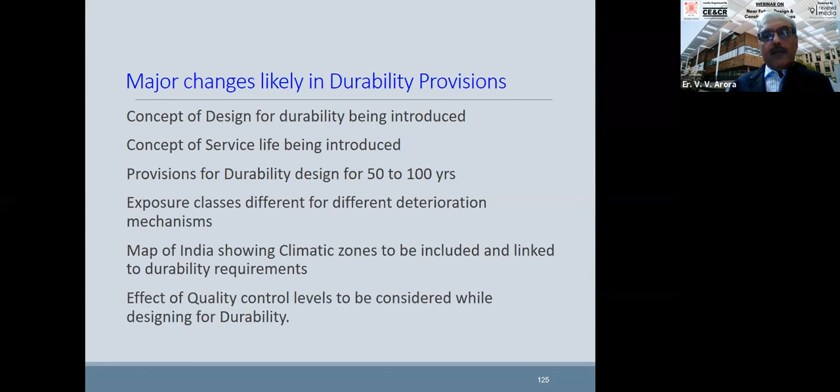This project management I had mentioned in my abstract, but I'm not covering that because of paucity of time—it's already one hour, I think. Major changes are likely.

For durability design for resistance to carbonation and chloride resistance, the concept of limit state design is being introduced. This performance-based design for durability will also be a limit state design, where we will have partial factors of safety on the resistance as well as on the load. And durability testing will be introduced.

Because you are assuming certain durability, we have to ensure that, like when we do a performance-based design for strength, say M35, we check the building for that, whether we are getting M35 or not. Only then it can be called a performance-based design. When designing a building for a particular strength, we call it performance-based strength design, and then we check the strength—we do cube testing, flexural testing. Similarly, once we introduce durability provisions, durability testing also has to be done.

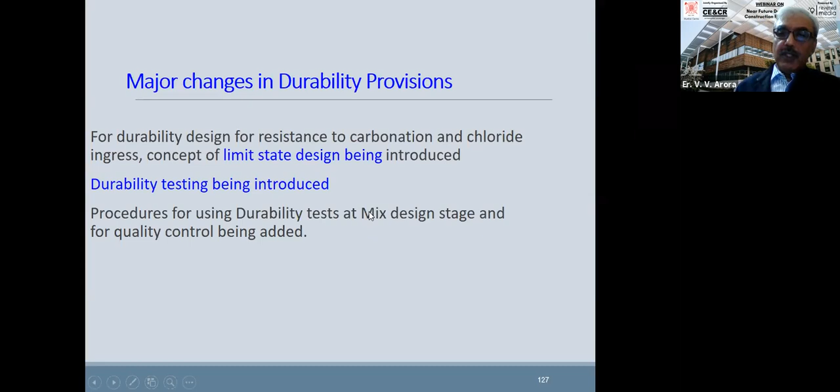Durability test procedures can include a resistivity test, an RCPT test, an air permeability test, and an oxygen permeability test. For oxygen permeability, a new code has also come up.

There will be a limit state of design for carbonation chapter. This durability testing is a long-term test for durability—this is the accelerated carbonation chamber. This test takes about 70 days, from which we determine the carbonation coefficient to be used in the design model.

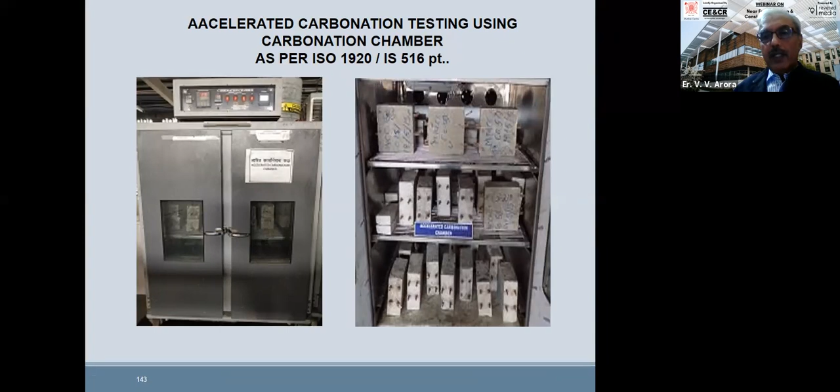Similarly, we have a test method for determining the chloride diffusion coefficient, which is also a 3-month test. For quality control purposes, we will have quicker tests. For chloride, we have a diffusion test where we immerse samples in chloride solutions for 90 days, from which we determine the chloride diffusion.

So these are the tests used to determine the carbonation coefficients. Either you determine from these test coefficients or from the equations we will give in the code, based on the water-cement ratio and type of binder.

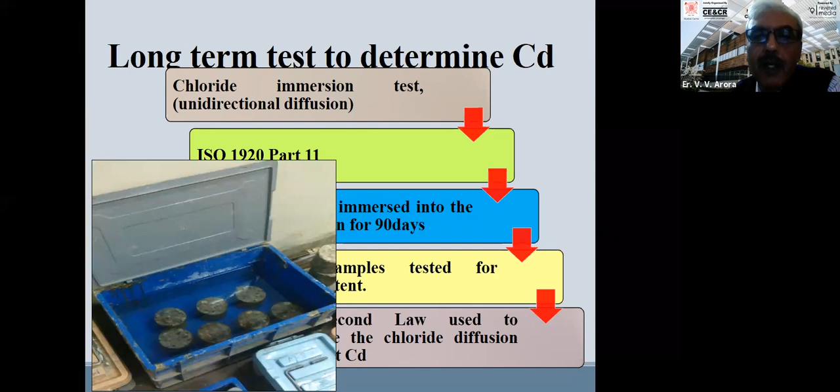For quality control, we will have other durability tests as mentioned—the RCPT test, resistivity test, air permeability test, and oxygen permeability test—so that at the time of mix design, whatever values you get for resistivity or RCPT, about 90% of those values will be achieved in the field. For this, samples can be constructed—just like we construct cubes, we can have small slabs, one foot by one foot, for durability testing, in addition to cube testing.

For sulfate attack, there will be some improvement in IS 456, but this will not be durability performance-based design, so I am not mentioning much on this.

The draft revised IS 456 will go for wide circulation after approval of the panel and CED, which will come very soon for public comments. At that time, you can all comment on the provisions for further improvements.

Then, similarly, design for fire.

This also has a lot of scope for performance-based design. This is coming up world over - not that it's common world over, but this talk is going on world over and some research is happening on this issue. But standards and codes have not come up on this performance-based design. New Zealand code talks of performance-based design, but it doesn't give much detail, and it is left on the consultants. So this is not common, I will say.

New Zealand building code has provisions requiring time temperature curves for different scenarios. What is performance design for fire? That means, like for durability, we should know the performance requirement and then ensure our structure is resistant to that.

Similarly for fire, we should know the exact fire load in a type of structure, the type of material stored in the building, the type of construction material used. We should know what will be the time temperature curve if fire occurs, and what firefighting measures are already installed in the building that can be accounted for or categorized. Then we require a time temperature curve for different fire scenarios.

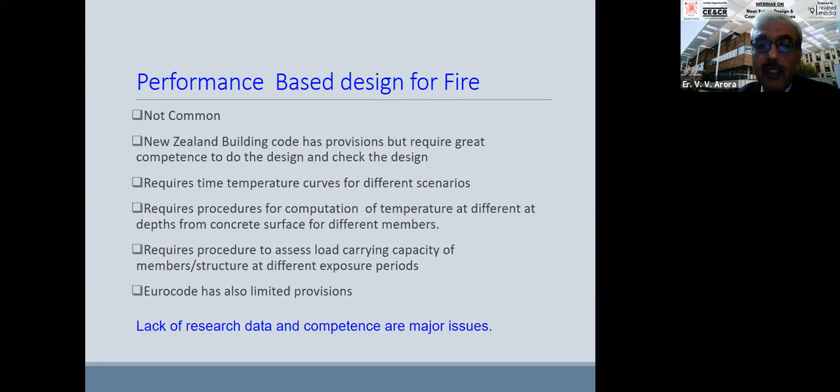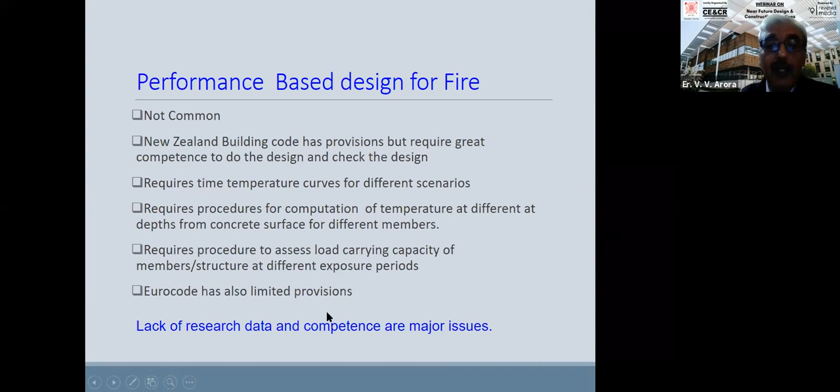In our country, the research is very limited on fire, and data is also very limited on fire accidents. When fire accidents happen in our country, we are not collecting data on how long the fire was there, what temperatures were reached, and all those things. Once we start collecting that data, and more research happens, then we will come to that. As of now, we are not jumping to performance design for fire. The only thing we are doing in the next revision, as I know, is giving enabling provisions - like talking of the strength reduction that comes over a period of time, that data we are giving in the code.

If we are using this kind of aggregate, what will be the strength reduction? So that if somebody wants to calculate, he should be able to calculate what will be the stress-strain curve at high temperatures. So stress-strain curve for steel, stress-strain curve for concrete at different elevated temperatures, that will be given. Then the strength reduction in the concrete strength for different water-cement ratios at different temperatures. Now those curves will be added, and it will be somewhat taken from the Eurocode mainly, but we have verified in our limited studies at NCB. So they are somewhat resembling that. So we feel that those curves can be utilized.

So likely near future practice will be, the Indian data is limited, as I said, and more research is needed. In forthcoming provisions, some enabling provision. So largely it will be a prescriptive specification only, where the tables will be given like we have now, only thing it will be upgraded. As more research is conducted and more competence is created, the data in IS 456 will help moving towards performance-oriented design. That is what I have as of now.

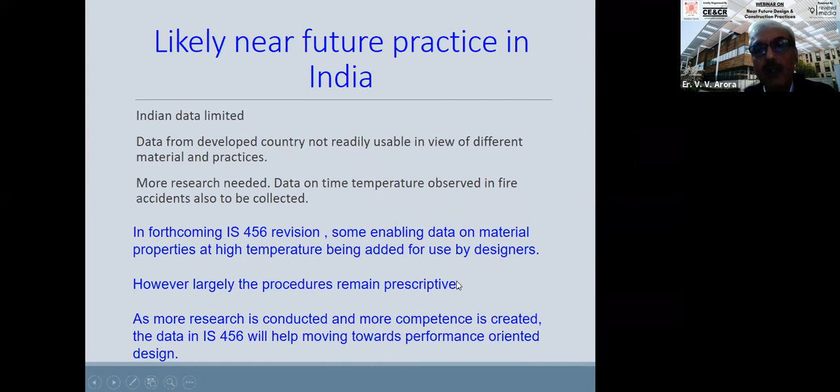Yes, sir. I think you're fantastically well in time, and that was a very interesting and very broad spectrum approach to seeing where we are going as the technology progresses. What surprises me tremendously when going through the presentation is that we have got codes for almost each and everything. Even modern materials like fly ash, metakaolin or silica fume have been around. But even things which are more recent, such as ultrafine GGBFS. So we have got codes for a lot of things, but the mainstream adoption is still somewhat lacking.

So what would you say are things that we can do as an industry or together to get these practices through? Which particular thing you're talking about? Even for materials and, for example, brand new materials. The adoption rate in general construction, maybe a few specialized constructions use it, but in general construction for durability enhancement, the application rate is very, very low, abysmally low. So how do we get these new technologies into the mainstream of construction? What is your experience? Because you're also dealing in that. Yeah, from our side, we are also in a very specialized line. We are facing the exact same problem. You got more exposure to the field than we have. Correct.